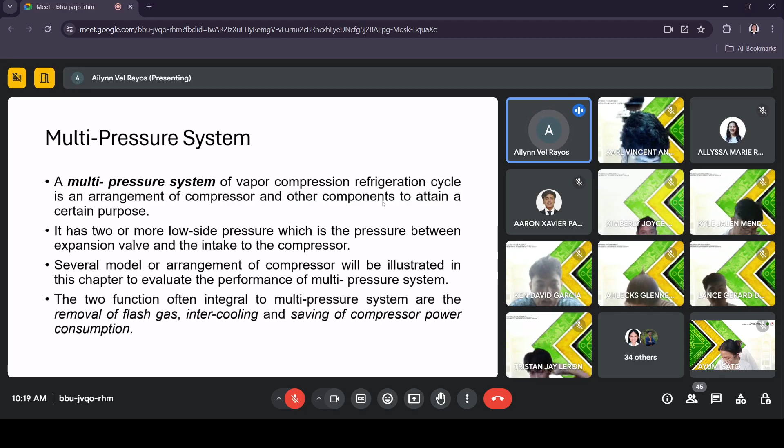So first, let us discuss ano ba yung removal of flash gas. Saving in the power requirement of a refrigeration system results if the flash gas that develops in the throttling process is removed. Saan ba yung throttling process? Dun sa expansion valve, paglabas niya nagiging wet mixture, meaning meron tayong liquid at vapor phase.

So sa removal of flash gas, na-separate yung vapor phase na galing dun sa throttling process, and then ire-recompress. Paano siya i-recompress? Yung vapor phase, ibinabalik siya doon sa compressor. At yung liquid, pupunta ulit siya sa expansion valve, ibig sabihin magdodoble yung expansion valve, and then papasok ulit siya ng evaporator.

So ibig sabihin, naghiwalay yung vapor at liquid. Yung vapor babalik sa compressor, yung liquid pupunta sa evaporator, and then magsasama ulit yun. Pagkalabas ng evaporator, magve-vapor ulit siya. So we'll be discussing this a lot later para mas maintindihan nyo paano nangyayari yung removal of flash gas.

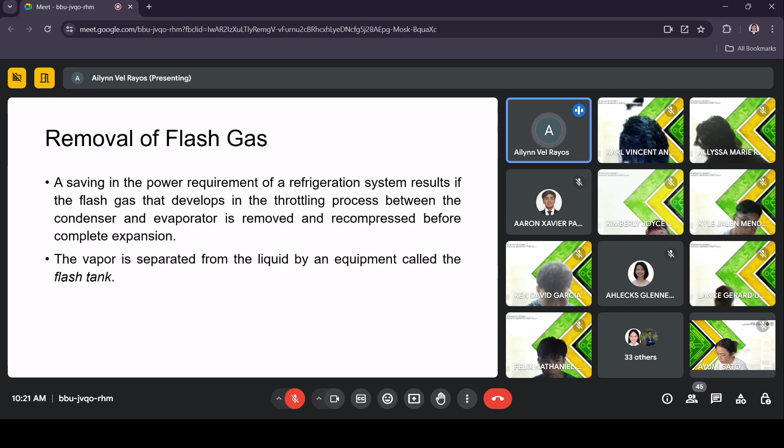So main is separation of vapor and liquid. Yung main function ng removal of flash gas is yung flash gas or vapor na develops sa throttling process ay ibinabalik sa compressor. The vapor is separated from the liquid by an equipment called the flash tank. If magkakaroon ka ng removal of flash gas sa process mo, you need to incorporate a flash tank to do the job, or to separate the flash gas. The separation occurs when the upward speed of the vapor is low enough for the liquid particles to drop back into the tank. Normally, a vapor speed of less than 1 meter per second will provide adequate separation in the flash tank.

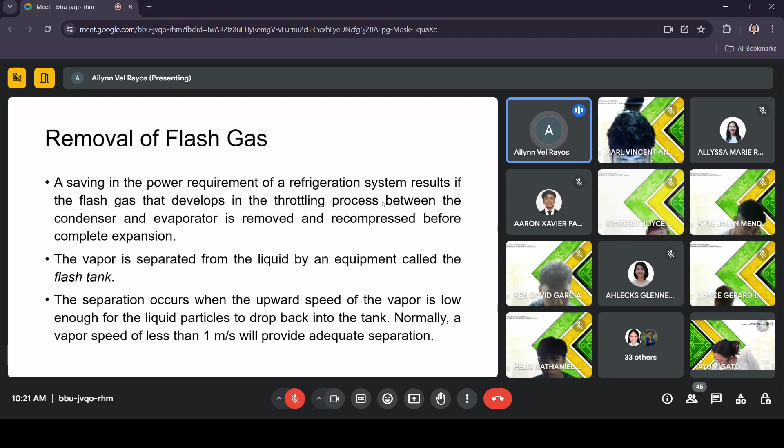So another is the intercooling. Intercooling between two stages of compression reduces the work of compression per kilogram of vapor. We'll also be discussing this statement later para ma-prove natin na may reduce of work of compression kung gagamit tayo ng intercooling. May problem tayo regarding this.

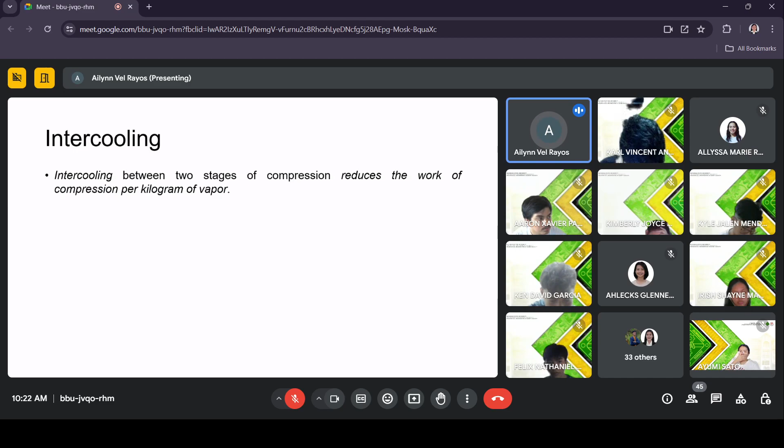Intercooling in a refrigeration system can be accomplished with a water-cooled heat exchanger or by using refrigerant. Intercooling is incorporated between compression, or sa compression process. The water-cooled intercooler may be satisfactory for two-stage air compression, but for refrigerant compression, the water is usually not cold enough. The alternate method uses liquid refrigerant from the condenser to do the intercooling.

So the discharge gas from the low-stage compressor bubbles through the liquid in the intercooler. Refrigerant leaves the intercooler as saturated vapor. So pwede siyang water-cooled intercooler, pwede rin naman through liquid refrigerant. Madami siyang cases na pwede i-set up.

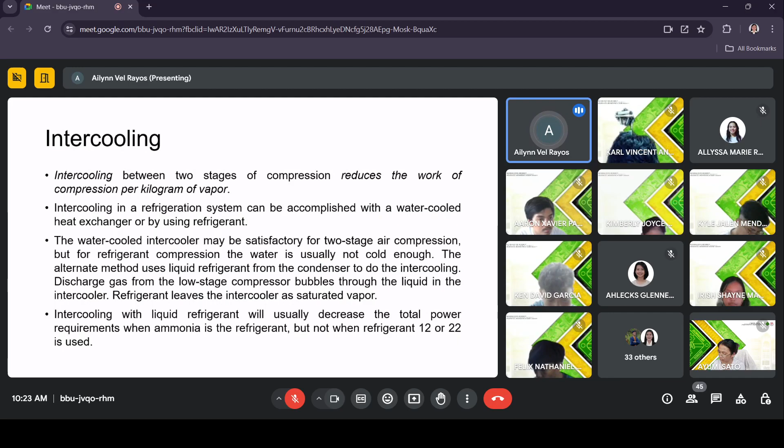Intercooling with liquid refrigerant will usually decrease the total power requirement when ammonia is the refrigerant. But when the refrigerant is 12 or 22, hindi siya. Pwedeng gamitin yung liquid refrigerant, pero siguro other refrigerants like R-12 or R-22, pwede silang gumamit ng water-cooled intercooler. Depende sa problem kung anong gagamitin, at depende doon sa inyong design project kung ano yung gagamitin nyong refrigerant.

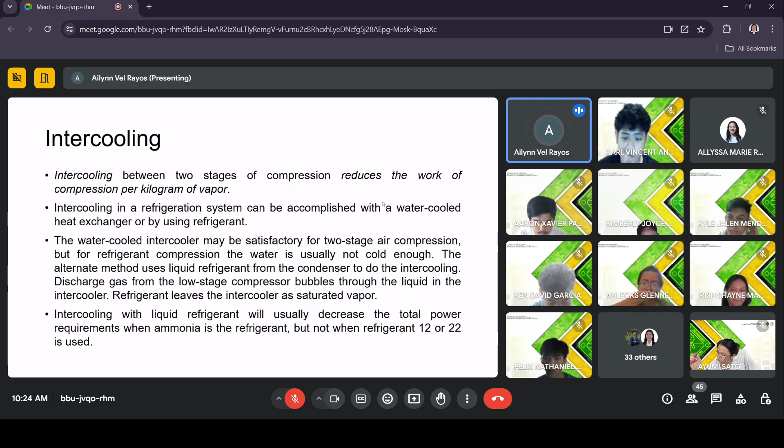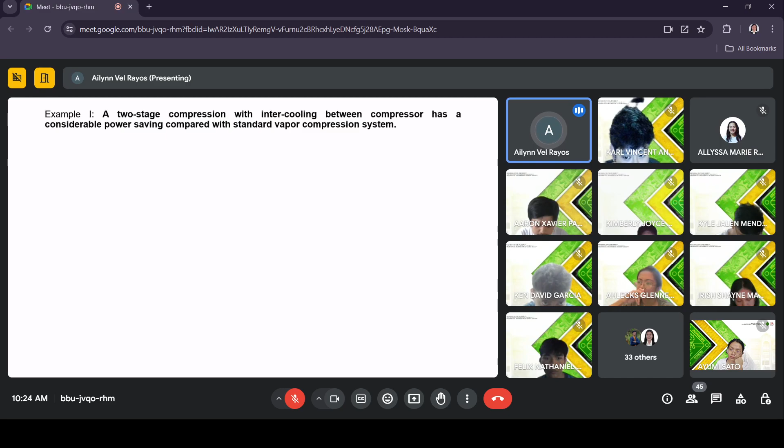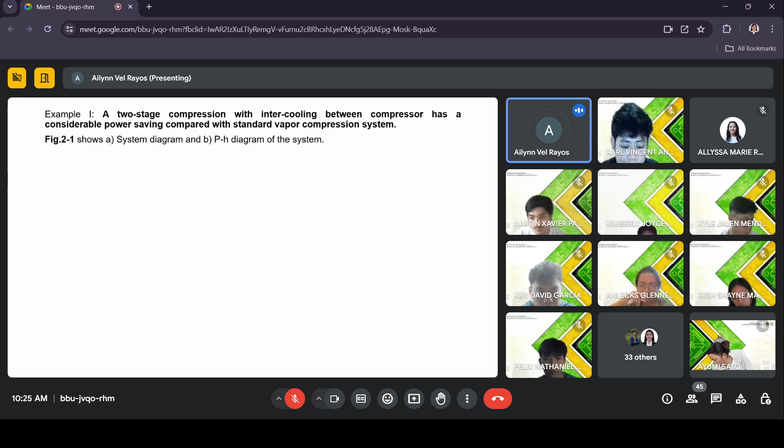Pag nagkaroon na ng defense, okay? So here is the first example natin na mayroong intercooling. Intercooling ay sa compression process in incorporate. We have two-stage compression with intercooling between compressor, which has a considerable power saving compared with a standard vapor compression system. We have here figure 2-1, which shows the system diagram and the P-h diagram of the system. Meron tayong two-stage compression, meaning meron tayong dalawang compressor kasi nga two-stage siya, with intercooler in between.

So again, you have to review how to get the enthalpies at each state point, so you know how to solve for whatever is being asked, like the refrigerating capacity. You can't get that without state points 3 and 2. Take note that for refrigerating capacity, you have to know the state point of the inlet and outlet of the evaporator, because that's where you get it.

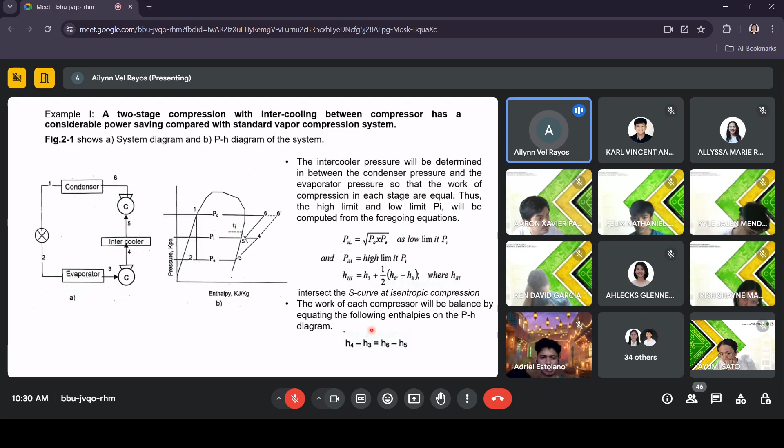Kasi as I have mentioned earlier, dapat yung work of compression natin ay equal. Meaning, para makuha natin, i-compare natin yung values nito. Dapat malapit siya or equal siya. So that is for low limit PI.

So alin yung 6 prime? Yung 6' natin is the enthalpy after leaving the compressor for standard vapor compression cycle. Meaning meron lang tayong isang compressor. Yung sa standard vapor compression cycle, that is 6'. So meaning, pag meron kang value dito at state point 3, tapos wala namang binigay na polytropic process, so meaning isentropic process siya. Yung standard vapor compression cycle natin, makukuha natin yung 6'. So we can directly get the value of H4 or the enthalpy at state point 4.

So after that, makukuha mo na, or this H4 intersect the S-curve at isentropic compression. Take note of that. So, meaning, makukuha mo yung intercooler pressure based sa enthalpy dito and then yung entropy dito. Meron pa din tayong 2 points para makuha yung intercooler pressure. Meron naman tayong sample problem dito para mas maintindihan nyo.

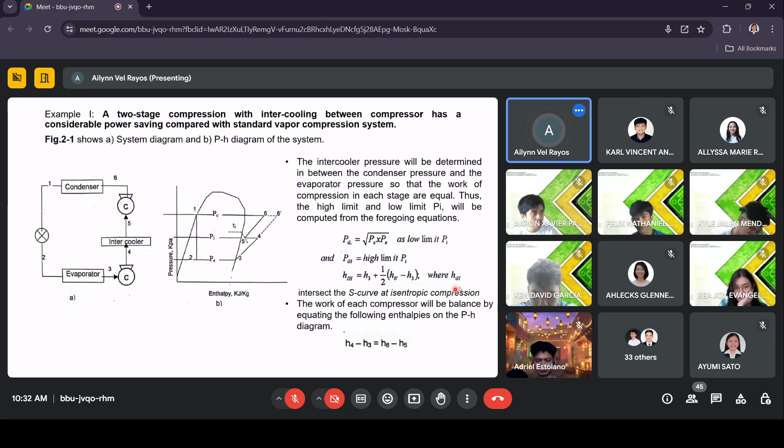And then, para doon, kukunin nyo ulit yung corresponding enthalpy ng state point 4, 5, and 6 para makuha natin yung ito. So 2 beses tayo magaganito. The first is for low limit PI and then the second one is for high limit PI. Tapos, kung alin yung mas magbibigay sa atin ng maliit na difference, yun yung gagamitin natin. Kasi yun yung magbibigay ng mas malapit na equal na work for both compressor. So, discuss natin para mas maintindihan.

Kindly read this problem, Adriel.

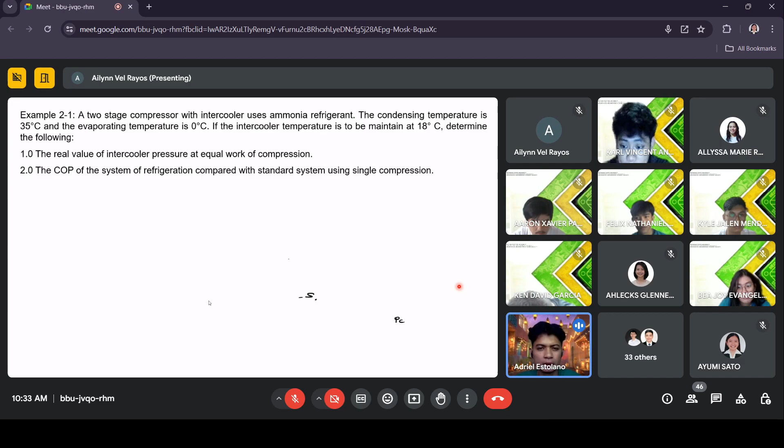As a two-stage compressor with intercooler uses ammonia refrigerant. The condensing temperature is 35 degrees Celsius and the evaporating temperature is 0 degrees Celsius. If the intercooler temperature is to be maintained at 18 degrees Celsius, determine the following: 1. The real value of intercooler pressure at equal work of compression. 2. The COP of the system of refrigeration compared with standard system using single compression.

Okay, so ito naman ay, yun yung component kanina. So we have your given and the schematic diagram and the system diagram and the P-h diagram. So from the problem, we have two-stage compressor with intercooler. Yung condensing temperature natin is 35 degrees Celsius and our evaporator temperature natin is 0 degrees Celsius. So meron tayong intercooler temperature which is to be maintained at 18 degrees Celsius and that is at temperature at state point 5.

So we're now going to determine the real value of the intercooler pressure. Again, as I have mentioned kanina, meron tayong dalawa. Meron tayong high limit PI, meron tayong low limit PI. So you will choose from that two kung alin yung gagamitin ninyo. Kaya ang tanong dito is what is the real value of the intercooler pressure at equal work of compression. Okay, take note of that.

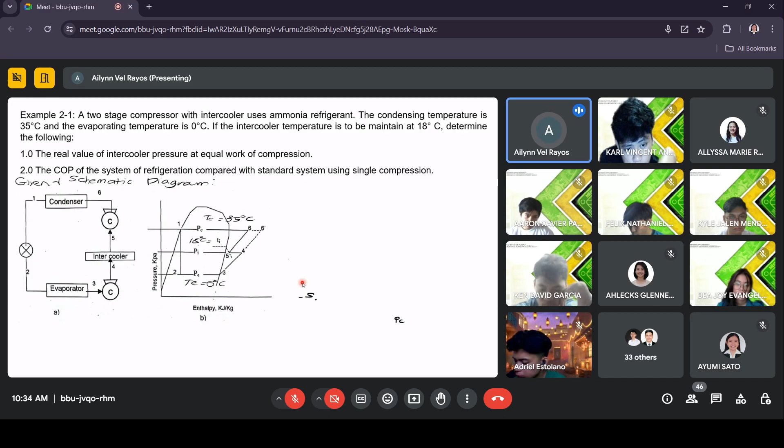So take note, required natin is PI where H4 minus H3 is equal to H6 minus H5. Kasi ito yun, 4 and 3 and then the other work is H6 minus H5. And then the other required is the COP of the system compared with the COP of the standard system. Alin ba yung standard system natin? Yun yung process 1, 2, 3, 6 prime, 1. Tapos yung system naman natin with intercooler is 1, 2, 3, 4, 5, 6, 1. Okay, yun yung cycle natin for system with intercooler.

Okay, so para natin siya kukuhanin. So first, I will ask you to get the enthalpies at each of the state points for standard muna. Ibig sabihin, kunin nyo yung state point ng 1, 2, 3, at saka 6 prime. So, we'll see if we have the same values.

Again, kailangan yung pagpraktisan, yung pagkuha ng enthalpy. Kung kulang yung mga sample problem na nabibigay natin during class, kasi meron lang naman tayong limited time, so make sure na yung binibigay natin ng mga problem set ay ma-review kung paano kuhanin. Kasi hindi naman ibinibigay yung problem set as a requirement lang. Yun is a review for the assessment task which is yung kagaya nung sa midterm exam. So, meron tayong mga sample problems. Kailangan i-familiarize syempre yung inyong sarili sa pagkuha ng mga enthalpy kasi isa yun sa pinakamahirap. Kasi kagaya nito, pag nahanap nyo na yung enthalpies, di na mahirap yung pagkuha ng COP kasi alam mo na kung paano siya kukuhanin.

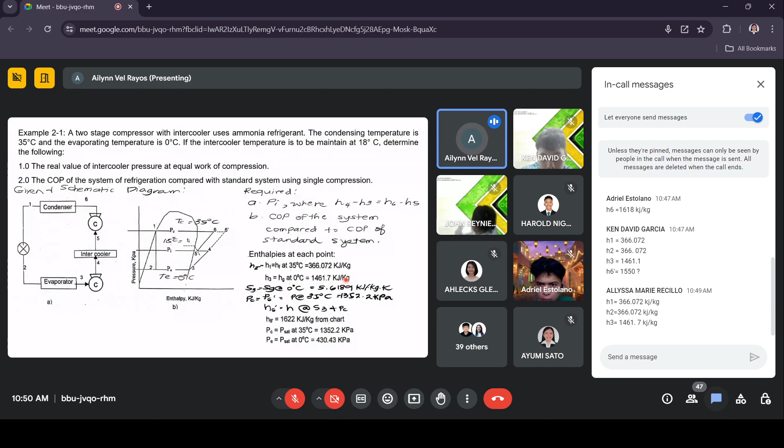So, PC, yan, PSAT, yan din yung kanina. PE is 430.43. And then given naman yung ating intercooler temperature, which is 18 degrees Celsius. So, ito yung sample wherein saan kinuha yung 1622, no? So, we have 1352 and then 5.61.

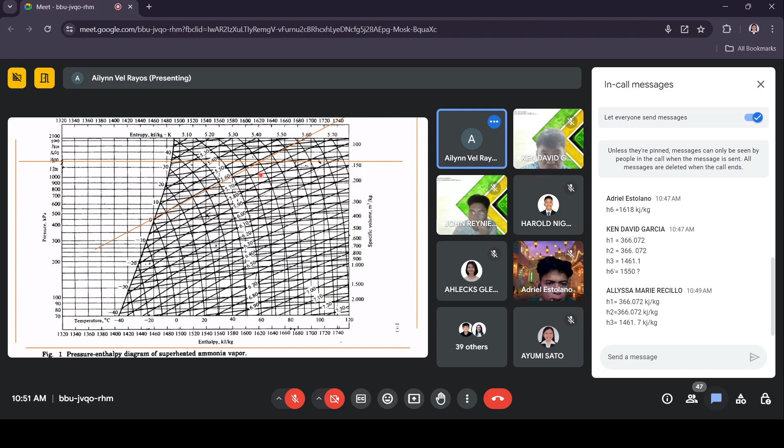Okay? So, kung mapapansin nyo, lampas na dito, pero ang tinitingnan natin is sa part na to. Kasi again, hindi naman tuwid na linya yon, curve yon. So, bali dito tayo mag-a-adjust nung 5.61 something. Mas adjust pa nga siya doon ng konti. Okay?

So, next natin is, yan, these are the values that we have obtained earlier. And we'll be checking kung ano yung gagamitin natin na intercooler pressure. Kasi again, meron tayong dalawang pwedeng pagkuhanan ng intercooler pressure. And from that, we have to check alin yung gagamitin natin. So, ang gagamitin natin is the one which will give us equal work of compression.

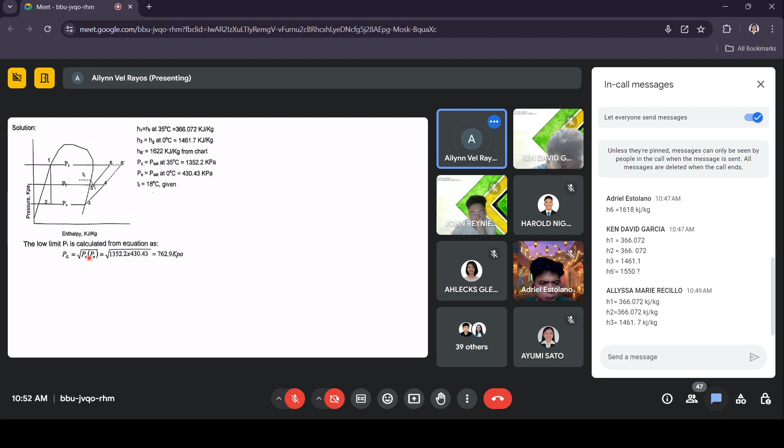So, meaning, pag nakuha natin yung intercooler pressure, we'll be getting the enthalpies at state point 4, 5, and 6. So, to get the low limit PI, we will have to substitute ito lang, yung PI natin dito. We'll be substituting the value of the pressure in the condenser and pressure at the evaporator. And then we'll get the low limit PI as 762.9 kPa.

And then, from this value of PI, we'll be getting the value of 4, 5, and 6 na. So, paano natin kukuhanin yung H4, yung H5, and H6 depende sa ating low limit PI. So, at this low limit intercooler pressure, we'll be getting the enthalpies. And H4, as you can see, is again, isentropic pa din naman yung process natin dito. So, we can use the PI or the intercooler pressure, low limit intercooler pressure, and the entropy at state point 3, kasi mag-intersect naman siya doon. So, we'll get at the chart value which is 1540 kilojoule per kilogram.

Yung H5 naman natin, again, kailangan natin ng dalawa. And as you can see, yung temperature ng intercooler at yung PI natin, pwede natin siyang gamitin and we'll get the value of 1482 kilojoule per kilogram.

Yes, Ken? Ma'am, paano nga po ulit nakuha po yung H4 po? H4 is ito, nakalagay naman dito, S3, which is equal to S4, kasi isentropic. And then since ito, low limit PI, equal naman ang pressure niyan dyan. So, yun yung gagamitin natin, sa chart pa din, okay? So, yung S4, S3, na nakuha natin kanina, which is 5.61, which is equal to S4. And then low limit PI na 762.9 kPa, sa chart titingnan. Clear ba tayo doon? Yes po, ma'am. Salamat po.

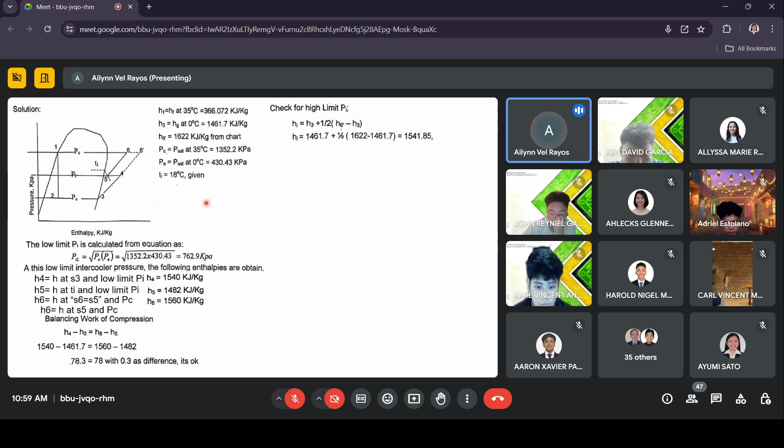High enthalpy at TI, or the intercooler temperature, and PIH, or the high limit, which is 790. So from the chart, you'll get 1480.

And H6, since this is still isentropic compression, we can use S5 which is equal to S6.

And PC, or the condenser pressure, from the chart we'll also be getting 1,550 kilojoules per kilogram. And then from that, we'll be balancing the work of compression and substituting values of H4, 3, 6, 5.

For high limit PI, same lang yung H3 kasi hindi naman to apektado ng intercooler pressure. So we'll be substituting H4 na na-obtain natin through high limit PI, that is 1541.85, minus H3, equal to H6, which is 1550, and then H5 is 1480. Therefore, nakuha natin is not equal, with a difference of 10 kilojoule per kilogram.

So therefore, we will be using 762.9 because it gives us only 0.3 difference. So therefore we'll be using 762.9 kPa, and ang work ng isang compressor is 78.

But since two-stage nga siya, we'll be multiplying it by 2 to get total work of the system using intercooler. So you can use 78.3 or 78, maalin dyan. Para siyang tama, but mas tama yung 78.3 kasi mas malaki yun.

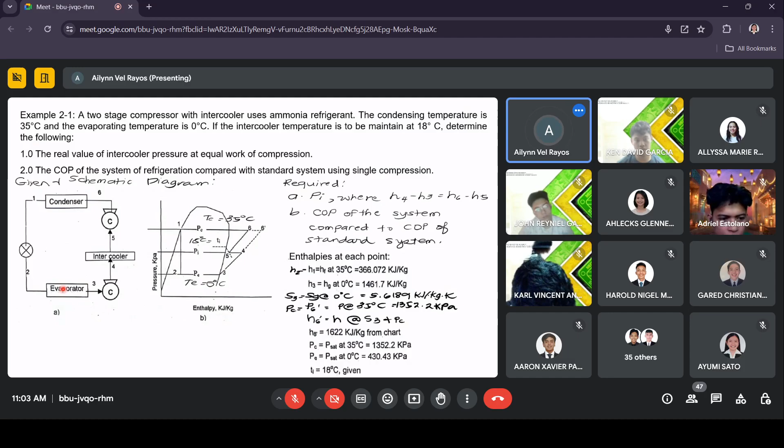So ano yung formula ng ating refrigerating capacity? Para makuha mo yung enthalpy for refrigerating capacity, kailangan alam mo kung ano yung state point ng evaporator, so that is 3 and 2. Therefore that is H3 minus H2. Clear ba tayo doon? Yes po.

Okay, so therefore for our refrigerating capacity, that is H3 minus H2. And then substituting work of compression with intercooler, that is 156, so therefore it will give us COP, which is 7.02.

Compared with the standard system, COP is 6.83. So H3, H2 natin, di naman yan nagbago, kasi in terms of the use of intercooler, compression work naman yung ina-alter niya. So same yung ating refrigerating capacity, which is H3 minus H2 divided by the work of compressor for standard vapor compression cycle, the 160.3, and that gives us 6.83.

So comparing the two COP, we have high coefficient of performance with the use of intercooler compared with the standard vapor compression cycle. So this also validates that if we have decrease in power requirement, there is an increase in COP. Do you have any question?

Naintindihan ba tong problem na to? Yes po ma'am. Okay, so again meron tayong madaming setup. Merong pinagsama na yung intercooler at flash gas removal. But here, parang pinoint out lang natin ano yung effect ng paggamit ng intercooler. So based from the given system diagram, kailangan yung makagawa ng pH diagram, or minsan given na din naman siya. So you have to identify kung tama ba yung inyong ginagawa, kasi kailangan tama yung mga enthalpies na makukuha ninyo.

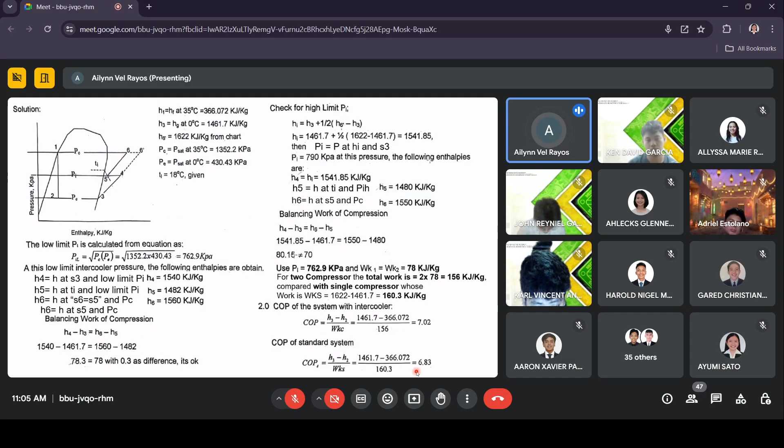Okay, next natin is the application of multi-pressure system. Can you please read the slide, Alex? Okay, how, sorry about po, you? Nag-CR po. Okay sige, can you please read the slide?

Multi-pressure system of refrigeration are commonly applied in dairy factory where one evaporator operates at about -35 degrees Celsius to harden the ice cream, while the other evaporator operates at 2 degrees Celsius to cool the milk.

Okay, so here are the applications of multi-pressure system. I-relate nyo din dun sa mga design project na inyong ginagawa, kasi baka need nyo din ng multiple evaporator. But in this case, nasa multiple pressure system pa naman tayo.

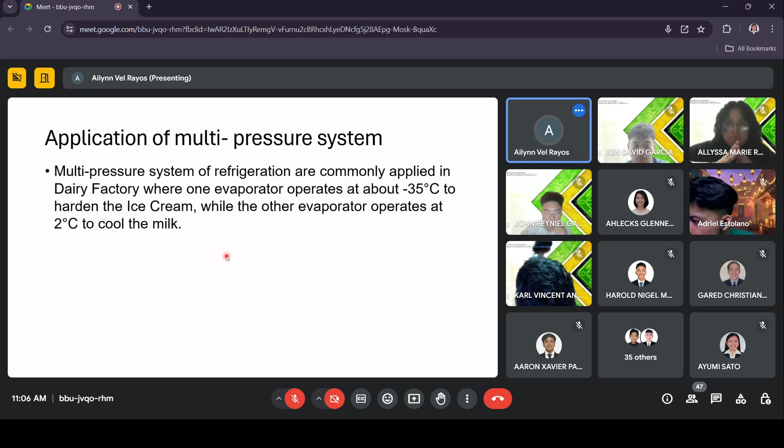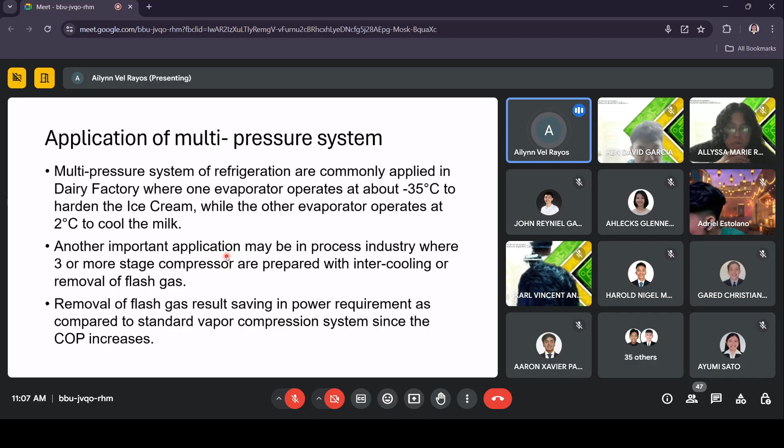Okay, another important application may be in process industry where 3 or more stage compressors are prepared with intercooler or removal of flash gas. So removal of flash gas results in saving in power requirement as compared to standard vapor compression system since COP increases. Dito, diniscuss muna natin ano yung effect ng intercooler at ano yung effect ng flash gas removal. So now we'll be using flash tank naman.

So this one is single evaporator, single compressor with flash tank for flash gas removal. So again, ano bang nangyayari dun sa flash tank? Sa flash tank, nire-remove niya or sineseparate niya yung vapor doon sa liquid. And then yung vapor refrigerant, bumabalik sa compressor, at kino-compress or nare-recompress. And then yung liquid, pupunta na siya sa evaporator.

Okay, so meaning at this state point 6, 1 to 2 muna tayo. Start tayo ng 1 to 2. Since this one is expansion valve, meron tayong isenthalpic process 1 to 2, and then we also have isenthalpic process ng 3 to 4. But in this case, meron na tayong flash tank dito.

So from our flash tank, meron tayong lumalabas na or meron tayong output na dalawa. Meron tayong state point 6, meron tayong state point 3. Sa flash tank, sineseparate yung liquid sa vapor. Nire-recompress yung flash gas, or yung vapor refrigerant, dito. So at state point 6, ang lalabas dito are vapor refrigerant, kaya siya andi dito.

At yung 3 naman, 2 to 3 are liquid. Kaya siya nandito sa saturated liquid line ng ating pH diagram. Okay, so dito muna tayo sa 3 to 4.

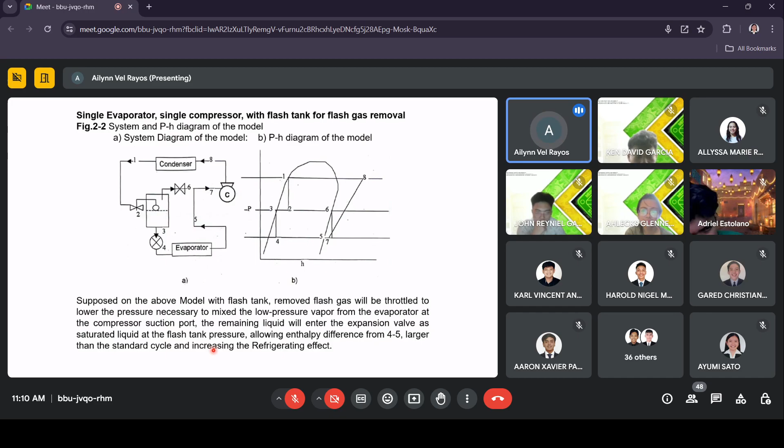So as you can see, kung meron tayong standard vapor compression cycle, tuwid lang to dito, no? At yung refrigerating effect natin is from 5 and then up to this point lang. But because we have flash gas removal, nagkaroon tayo na mas mataas na refrigerating effect. From dito, naging nandito na siya. Clear ba tayo doon?

Naintindihan? Yes po, ma'am. Opo, ma'am.

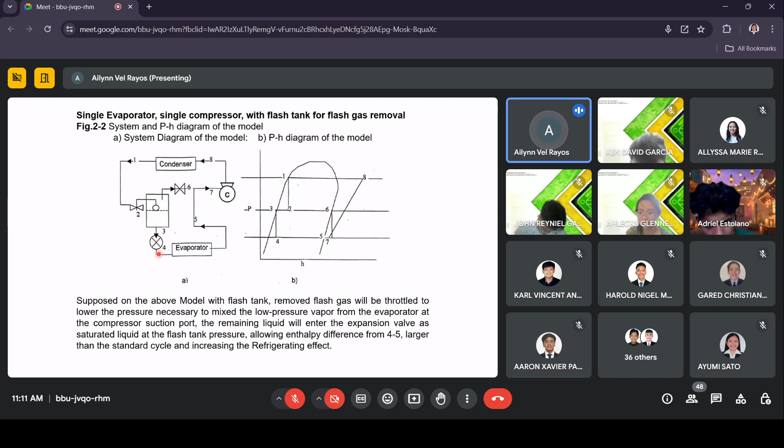And then M2 naman yung liquid na lalabas dito, which also will flow dun sa ating evaporator and then pupunta siya doon sa junction, M2. And then this one is M1 and then may junction nga doon, so magsasama M1, M2 and then yan yung process. Dito magkasama ulit, tapos maghihiwalay through dito sa flash gas and then paikot-ikot lang siya. Okay? Clear ba tayo doon?

Yes, so po, this is another set of multi-pressure refrigeration system. So we have flash gas removal, which increases refrigerating effect.

So from the model, the condensing temperature of ammonia refrigerant is 35 degrees Celsius and the evaporating temperature is 0 degrees Celsius. So let the throttle valve maintain the flash tank pressure at 760 kPa, ito yun, and determine the following. So first, A, the enthalpy at all sections of the system.

Kukunin natin yung lahat ng enthalpy dito sa system na to. And then B is mass flow rate of refrigerant vapor leaving the flash tank. Ano yung okay, you have to take note kung anong mass ang hinihingi dito, mass flow rate of refrigerant vapor leaving the flash tank.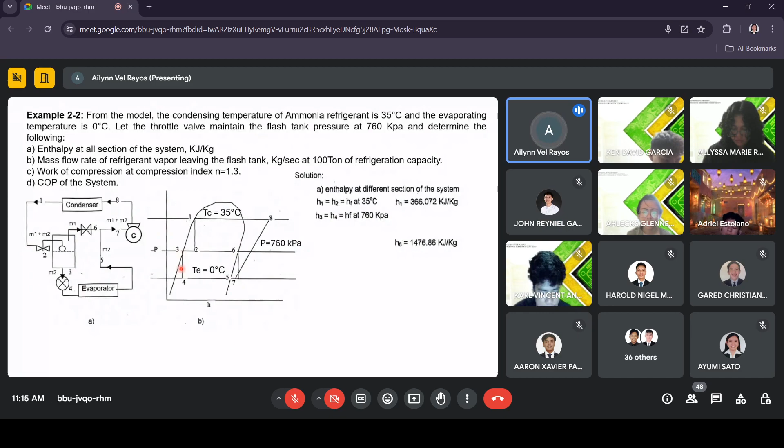So let us get different enthalpies. H1 is equal to H2, which is HF at 35 degrees Celsius. So from the table, that is 366.072 kilojoule per kilogram. H3 naman natin, as you can see, we have constant pressure sa ating flash tank. So we have HF at 760 kPa, ito yon, which is equal to H4. So meron na tayong 4, that is equal to 271.126. So next one naman is H5, is vapor leaving the evaporator at 0 degrees Celsius. So take note that is equal to 1461.7.

H6 is ito. Kailangan, again, baka nalilito kayo sa pagkuha ng values. Pag siya'y nasa loob ng saturation line, isa lang properties ang kailangan nyo, either temperature or pressure yung given doon sa line na yon. Equal yan, yung tuwid na line na yan. Pero pag nasa labas na siya, ibig sabihin sa chart nyo na siya titingnan. Pero dito, iba to, subcold, ito sa superheated chart. Okay? So ito, saturated liquid line, itong line na to, ibig sabihin HF ang titingnan nyo. Ito naman, yan, HG naman yan. Review lang ulit, so H6 is HG at 760 kPa, which gives us 1476.86 kilojoule per kilogram.

So ano ba yung nawawala? Nawawala pa is 7 at 8. Pero hindi naman natin na siya makukuha using properties, kasi 7, ano bang known properties sa state 7? Pressure lang, wala temperature, wala kahit ano. Tapos polytropic process pa siya. So meaning dahil superheated na siya, di nyo na siya makukuha.

So pwede na kayong lumipat ng other process depende, which is yung energy balance. Kagaya nung sa heat exchanger, yung liquid to suction heat exchanger, nagkaroon tayo ng mass balance sa heat exchanger to get one enthalpy missing doon sa buong system. So this one, pag meron kayong hindi makuha na enthalpy through chart, you can use energy balance. So dalawa yung pwedeng pagkuhanan dito, pwede dito sa junction, pwede dito sa flash tank. Pero ang hinahanap natin is H7 at H8. So dito may H7, so meaning sa junction tayo muna mag-energy balance.

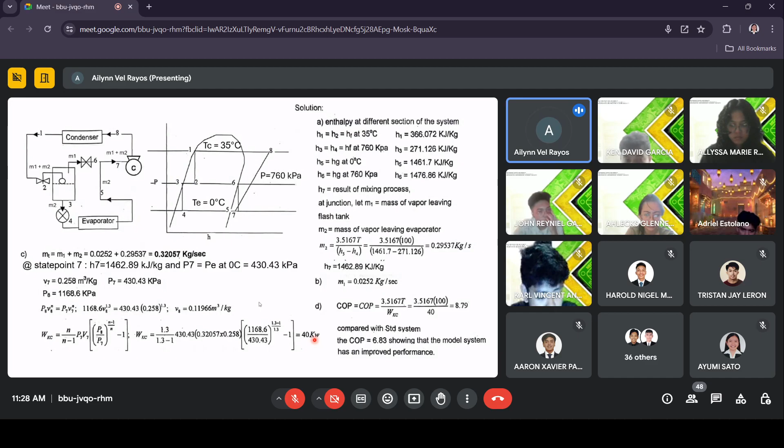Okay, this is just a sample. And we'll also be utilizing this. Multiply na po yung...

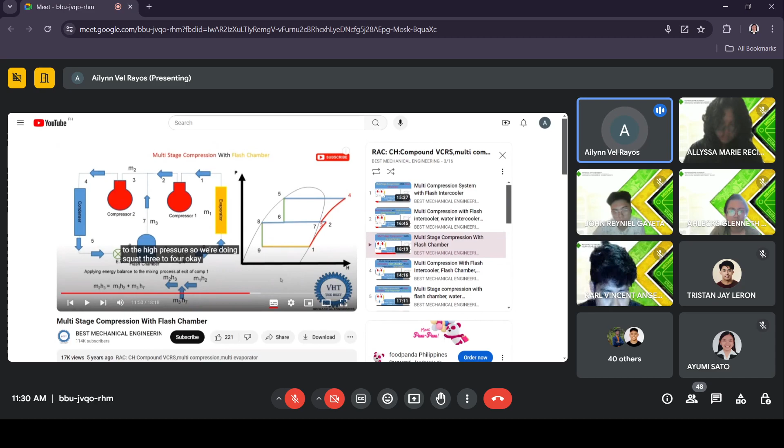Because like this, in this case, how do you get our compressor work? Since there are two compressors, that means this one is H2 minus H1 plus H4 minus H3. What about the refrigerating capacity of this? So the refrigerating capacity here is, what is this? Is that in the evaporator? Find the evaporator 1 and 9. So that's H1 minus H9. This is it too. That's why, even if the process changes, as long as you know how to find the enthalpies, then there will be no problem. As long as we know the process, what happens when there's intercooling, what happens when there's flash gas removal.

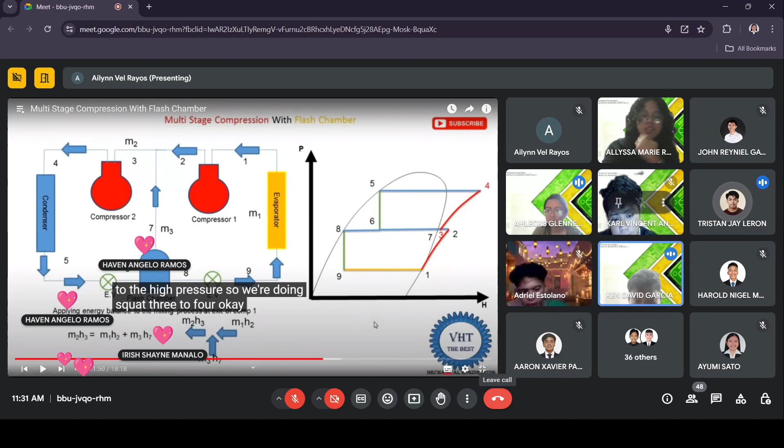Thank you po, ma'am. Thank you po, ma'am.